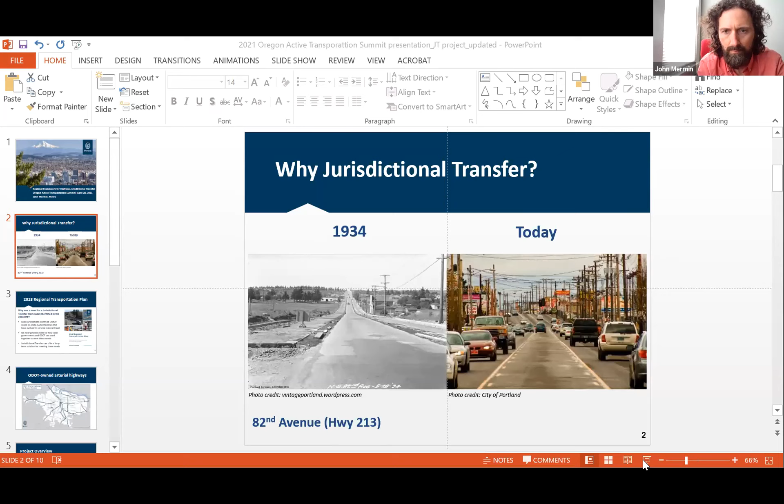Great. So I'm going to talk a little bit about the regional framework for highway jurisdictional transfer project that Metro recently completed with the help of WSP as our consulting firm, and in close collaboration with ODOT. Glen Bolen, who will be speaking later, was the lead from ODOT. And the issue of jurisdictional transfer comes right out of that history that Margi just described.

When some of these arterial type highways were first built, like 82nd Avenue on the left, it was the major route for connecting the whole state to the new airport. And there wasn't much development along it. It served the long distance travel. But fast forward to today, when the interstates have replaced that longer distance function, it's functioning in a much different way, with much more biking, walking, and transit demand along it, and much less longer distance travel. So the function has really changed. So the idea of transferring the ownership has come to be a long-term solution to help address this change.

So in our most recent regional transportation plan, this idea came up because local jurisdictions identified that there are some unmet needs along these roadways. There are safety issues, equity issues that are feeling really urgent. And these roadways are no longer serving state travel, but there wasn't a clear process for how to work with ODOT on how to meet these needs. So jurisdictional transfer provided this long-term solution for helping with this situation.

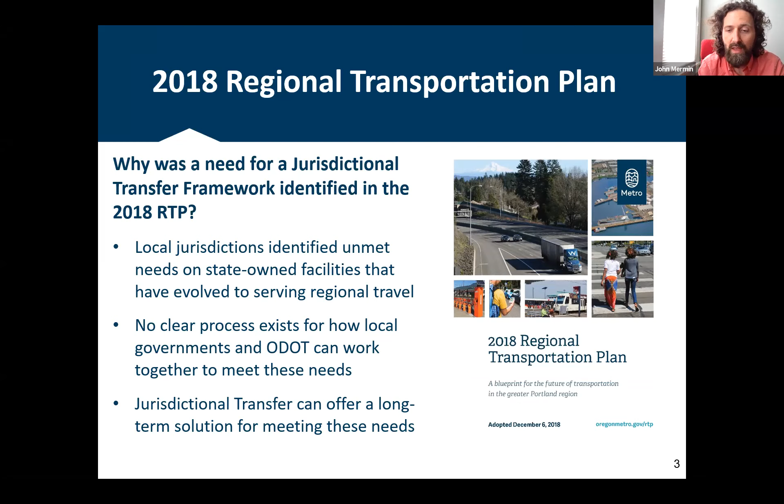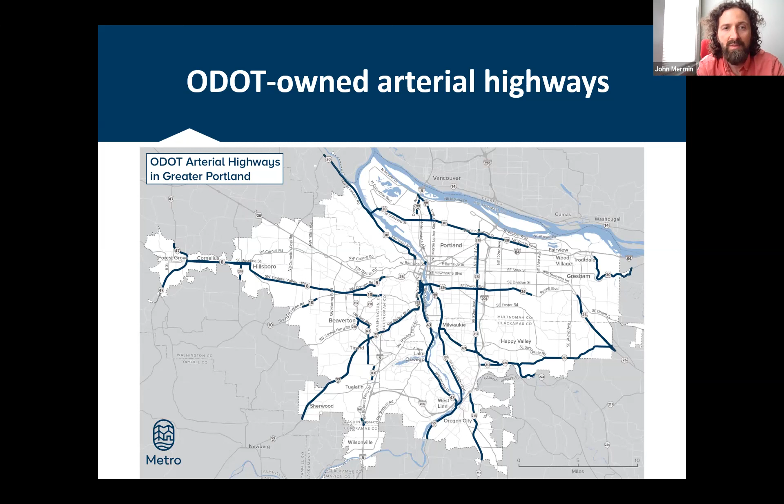So we kicked off the project, and this is the universe of roadways, these arterial highways that exist all over our region, north, south, east, and west. You can see TV Highway to the west, 82nd Avenue in the east, Highway 43 in the south. You can see they're all over the place. And so it's a very relevant issue for the entire region.

So with this project, what we did was really try to create a framework for how to create action on this issue going forward, and address the related issues to transferring a roadway, such as how the roadway is classified in the Oregon Highway Plan, how to do cost estimating when you're trying to fund a transfer, and what are the actual legal mechanisms for transfer. We didn't try to commit any funding or commit any jurisdiction to any specific transfer roadway, but really help set the framework going forward so we can move these along in the future.

So the study, which is available on our website at oregonmetro.gov/jurisdictionaltransfer, contains a lot of elements. There's a nice executive summary that really runs through the highlights. I'm going to share a few images from some of the inventory and atlas work to give you a sense of what you can find in it. But just to run through this quickly, we did a policy framework which described best practices for transferring roadways from past history in Oregon, and Glen's going to provide a few examples of that during his presentation in just a minute.

An inventory and atlas with images and existing conditions information for all these corridors, an evaluation of each corridor based on technical evaluation and a readiness evaluation, so kind of combining those two factors. How to do cost estimates, as I mentioned before, recommendations for changing roadway classifications, what are the equity considerations when doing jurisdictional transfer, and then lastly, a needs assessment on the corridors that seem the most ready, that were in the top tier.

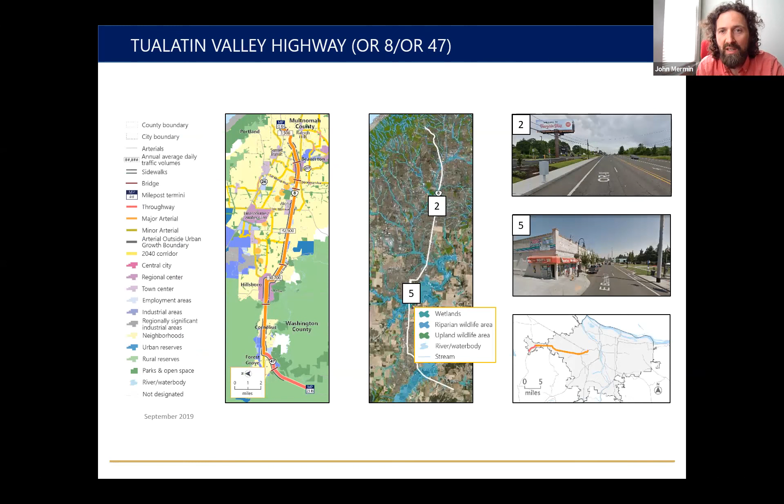So this is an example from TV Highway. This is from our inventory and atlas. You can see a map of the corridor, what the environmental conditions are along it in terms of wetlands, wildlife, and riparian areas, a few images from the different points along the corridor. We provide information relating to existing conditions for the biking, walking, and transit system. What is the speed limit? What is the crash history for both pedestrians, bicycles, and vehicles? And what is the population and employment numbers along the corridor?

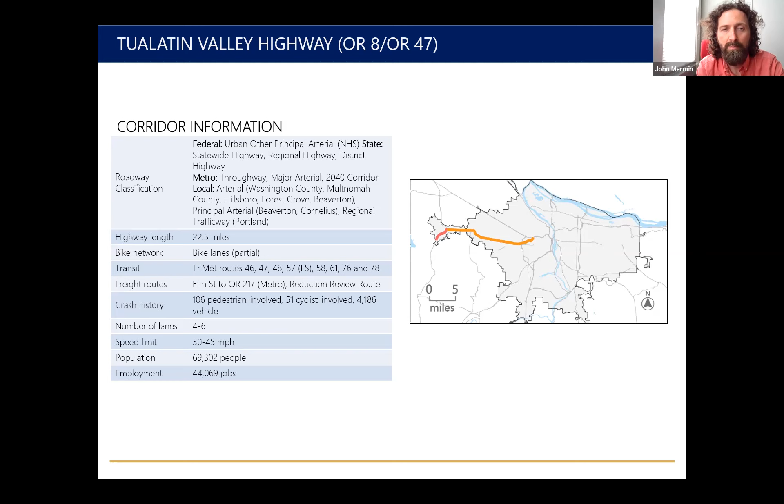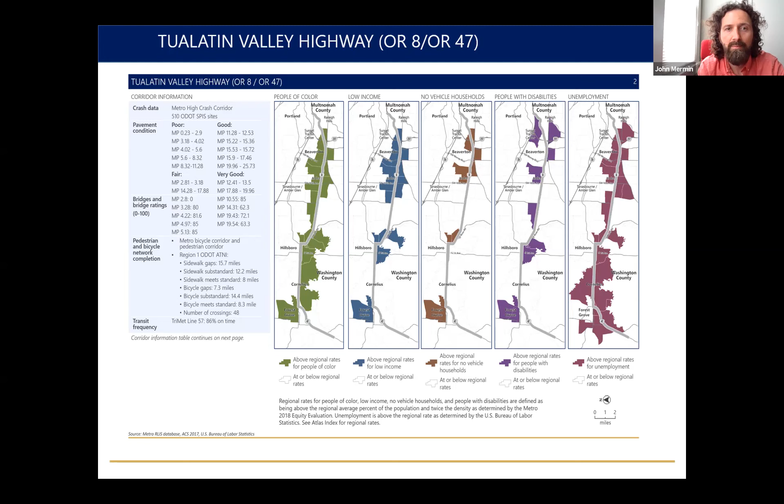With that, I'd like to hand it off to my colleague Glen Bolen at ODOT to talk a little bit about a couple of past transfers that have happened in the state of Oregon. Thank you, John. Just get my screen up. Yeah, my name is Glen Bolen. I am a planner with Region 1 ODOT. My pronouns are he, him, and okay, can't see the screen anymore.

There was incentive or mutual benefit. And these are places where the community was looking for a different type of roadway. And ODOT transferring a roadway is a big cost savings in the long run because of maintenance. With gas tax revenues on the decline, maintenance is becoming a bigger and bigger issue all the time. And so this is a way for cities to kind of get something they want and ODOT to save money in the future as a change occurs.

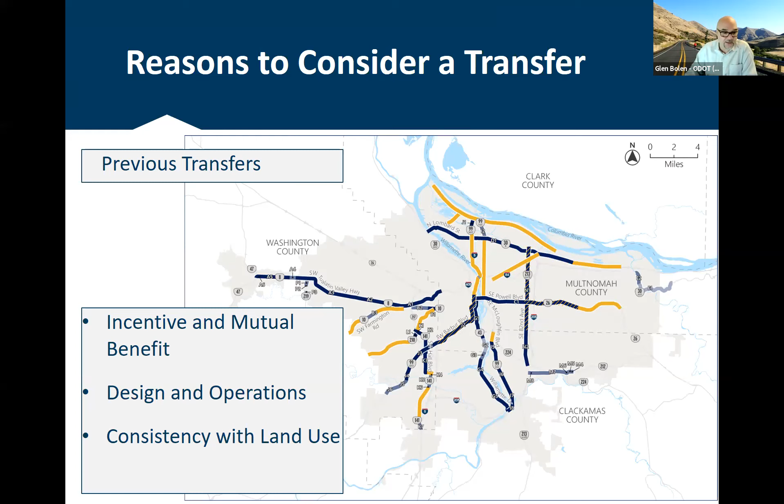And then this one has to do with land use. This is changing environment. I think John showed you a great example of 82nd Avenue and the land use pattern there, as it was when we just had to get to the airport, and as it is now when we have lots of people living and working in the area. So I'm just going to walk through a few examples here.

One of them on the incentives and benefits side is Martin Luther King Jr. So I've got a kind of before-after picture here. Unfortunately, the air photos in 1994 weren't that great, but we had a 5-lane curb-tight arterial. The city wanted to do something different with their design, and you can see now they have on-street parking, they have pedestrian crossings, medians, a significant change from what would have been doable in the highway design manual. And part of the incentive side of this, ODOT did reconstruction of the viaduct further south, gave up some leases and property for use by the city and development opportunities.

There's just one example. Another one, this is on the design and operations side. So this is Forest Grove, 1999. To get through Forest Grove on Highway 47, you went really through Forest Grove, and the city was looking for a highway level of service for a highway, which, as you can imagine, is difficult to do in downtown.

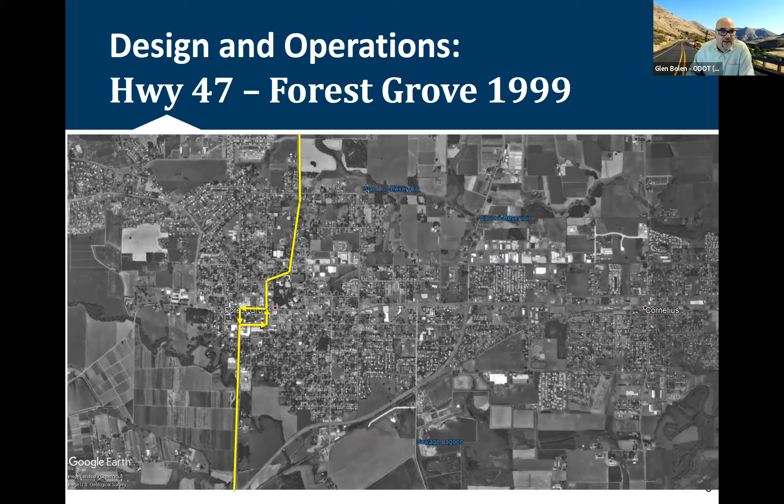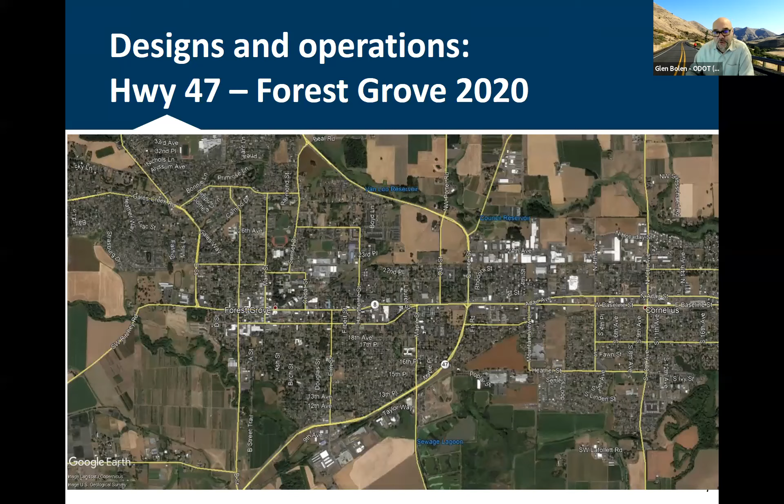So what happened instead, and you see here the road network now, Highway 47 goes around. It's a bypass going around Forest Grove as an expressway, and then the old highway was ceded to the city of Forest Grove. You can imagine downtown Forest Grove really wasn't the optimal location for significant through traffic that happened as we grew.

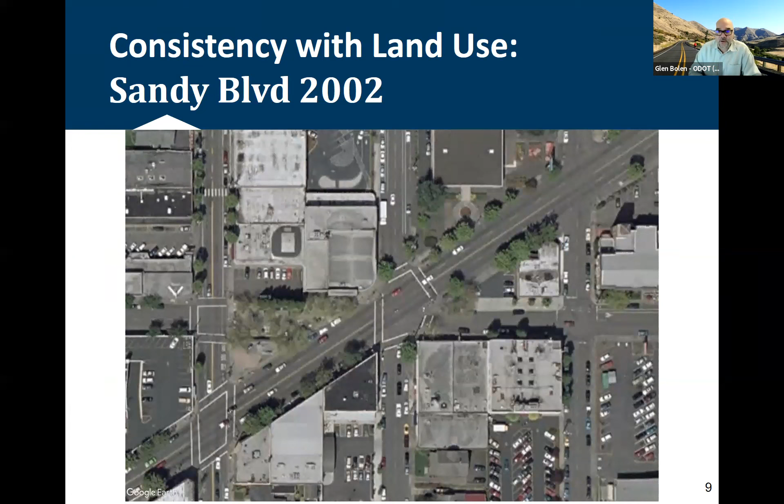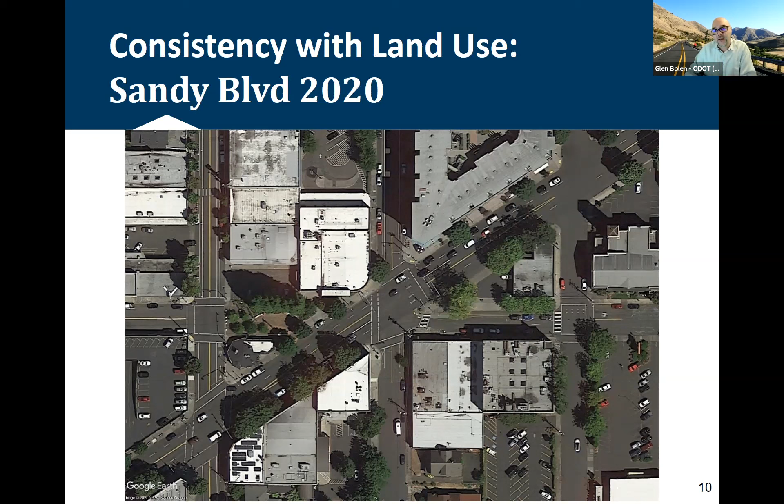Another example here is Sandy Boulevard. This was not on the incentives and benefits side, and there wasn't any big exchange of funds. But in this case, the city just wanted to do more multimodal design, things like markings and streetscape and crossings and furnishings, things to help support the redevelopment of the Hollywood area and beyond.

Unfortunately, I got a rainy Google Earth picture day, but you can see we now have bike lanes, the green suggested crossings and facilities, and redevelopment that's been happening.

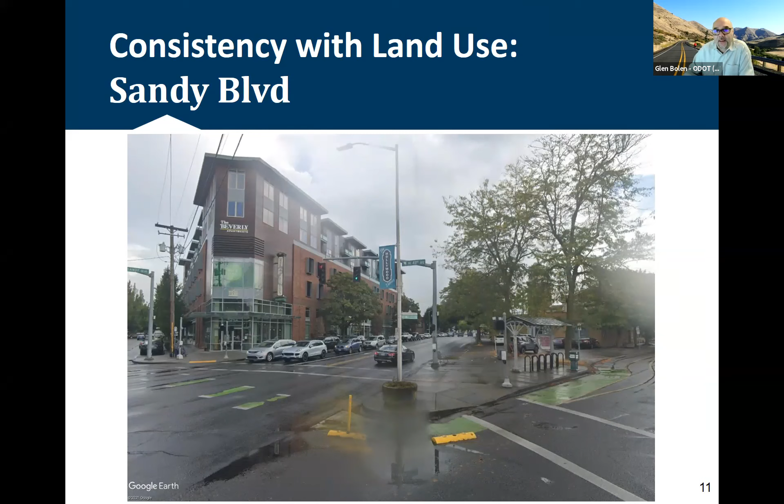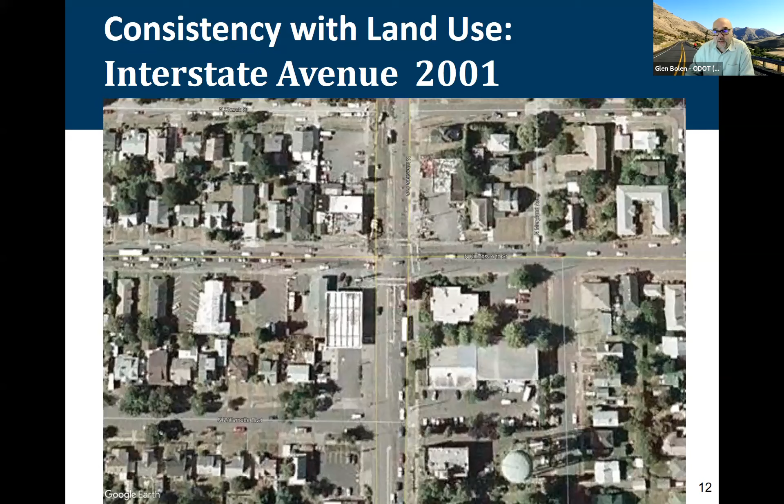And another big example here, and this is another one about changing land use. The city of Portland, trying to implement their comprehensive plan with centers and corridors, was planning with Metro the Interstate Avenue light rail, and the light rail couldn't happen on the state highway, so this one was given to the city of Portland.

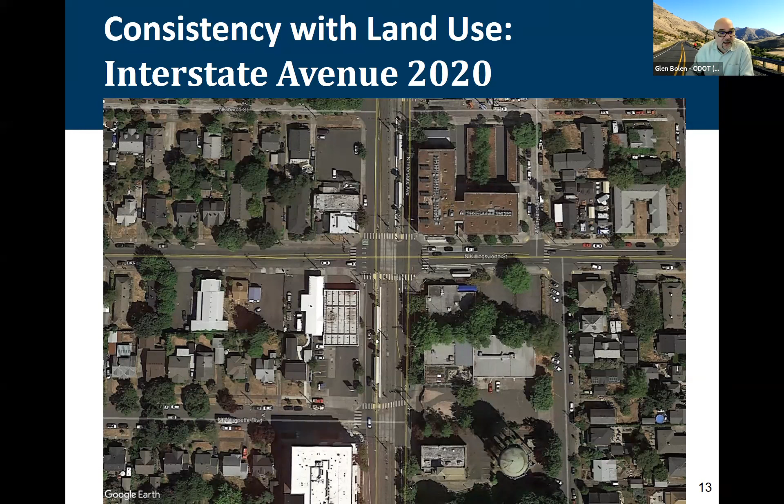I'm sorry, this transfer had no funds. There were some funds involved with Sandy Boulevard, funds from ODOT for state of good repair type of work. So in this case, the light rail went in following the transfer using FTA money and local regional match. And I think you all know what's been happening on Interstate Avenue.

So this is just a quick snapshot of a few examples. We are in conversations with our partners for several others. The City of Portland adopted the 82nd Avenue plan; I think Karla's going to talk about that. Shelli's going to talk about Outer Powell that we're working on. We were hoping to work a transfer for Barbur Boulevard with the bond measure that did not make it, so that's on hold for now.

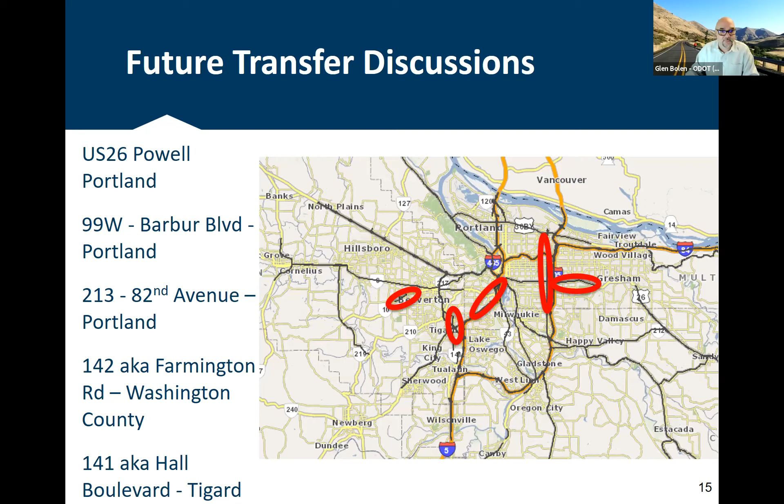We're engaged actively with the city of Tigard for Hall Boulevard. It's a residential corridor there north of their downtown, and they'd like to make some changes. And then a small piece of Farmington Road out in Washington County. So that's just what's on the radar, but this report hopefully presents the options for other opportunities throughout the region. And with that, I will stop sharing my screen.

I think, Karla, are you next? I think it's Shelli next. Shelli. Yep. Hi, everybody. Okay. You see my screen? Not yet. Okay. One second here. Sorry, having a little bit of technical challenges sharing my screen. There it is. Okay. I just made you co-host, Shelli, so let's see if that helps with your screen sharing. Okay, thank you. I think we should have it now. There you go. Okay, thank you, Sarah.

Hi there, I'm Shelli Romero. I am Area Manager Central for ODOT Region 1. Most of my projects are within the Central City. So this is a quick presentation on ODOT and PBOT moving towards a jurisdictional transfer, focusing on Outer Powell.

Outer Powell specifically is a high crash corridor and had a lot of need for safety improvements and also basic infrastructure: bike lanes, crossings, sidewalks. The basis of the project was to make Southeast Outer Powell safer for all people using all modes. We had robust community and agency involvement and collaboration, and worked with the community, PBOT and other partners to identify community preferred solutions.

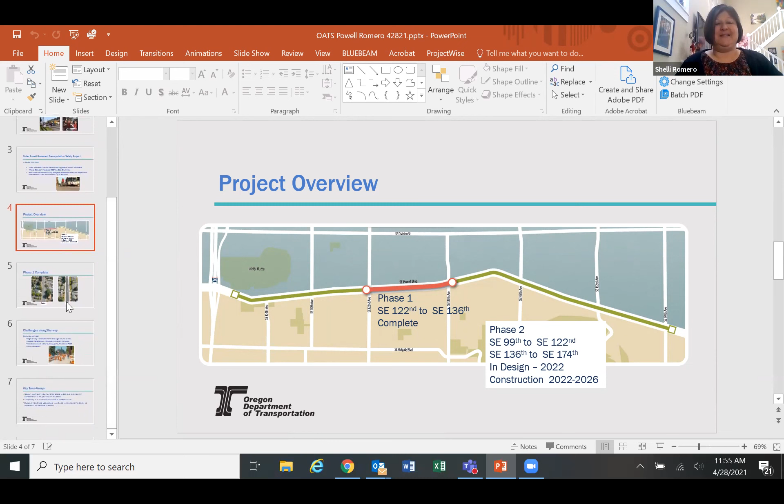So this is a picture of the before and after of phase 1, which is Southeast 122nd to 136th. You see the before on the left and you see the after on the right. And that is separated with Tuff Curb bike lanes that you see there.

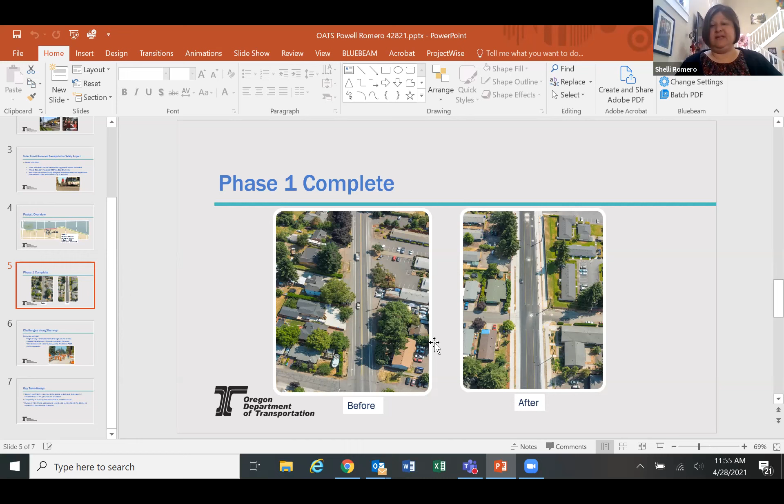Challenges along the way: as I mentioned, it's a complex corridor. We found there's a lot of right-of-way issues, so undefined driveways that need to be defined, acquisition of a small amount of right-of-way for our project, but also encroachments, meaning that people have been parking on the side of Powell for years, which is technically ODOT right-of-way, but we've never really enforced that.

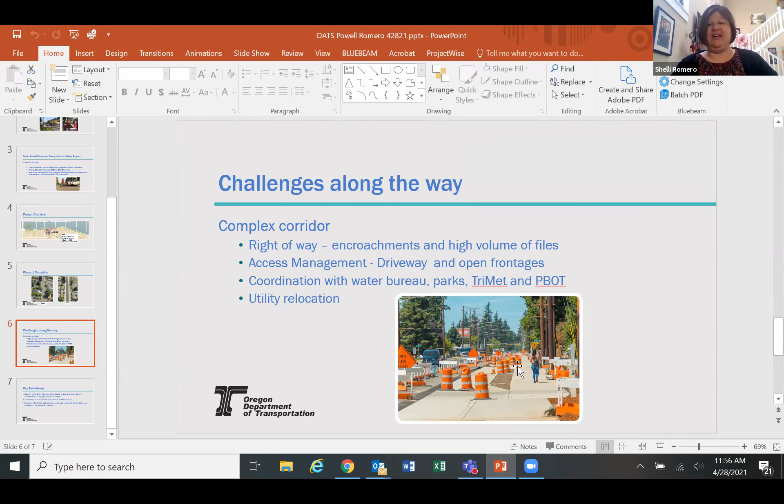So access management, as I mentioned, the open frontages and driveways, and then coordination with the Water Bureau, Portland Parks, TriMet, PBOT, and then there's a whole mess of utilities out here, not just the water line, but PGE, Northwest Natural, communications, which, if that doesn't go on schedule or as planned, can cause a lot of risk to the project.

So our key takeaways are that we worked together with our partners at PBOT and others in the community to identify a long-term vision and the steps to achieve the vision, on the premise that everybody in our city deserves basic infrastructure. This is a transit-dependent route. Besides English, the highest number of folks in the area are speaking Chinese, Vietnamese, Russian, and Spanish. And finally, getting support from the state legislature to provide funding and to initiate a jurisdictional transfer.

And that's what I've got. So with that, I'm going to go back and get out of here and turn it over to you, Karla. Thanks, Shelli. I will share my screen. Thank you. Great. Are folks seeing my screen, just to confirm? All right, I see a thumbs up. I will put it in

presenter mode. All right, so I am Karla Kingsley. I'm a senior planner at the Portland Bureau of Transportation. And today I'll talk a little bit about 82nd Avenue specifically. I'll note that Kristen Stallman is kind of my counterpart on 82nd Avenue. She was going to be here, but with the shift in dates, she had a conflict. But thanks a lot to her for helping prepare and for doing all this work.

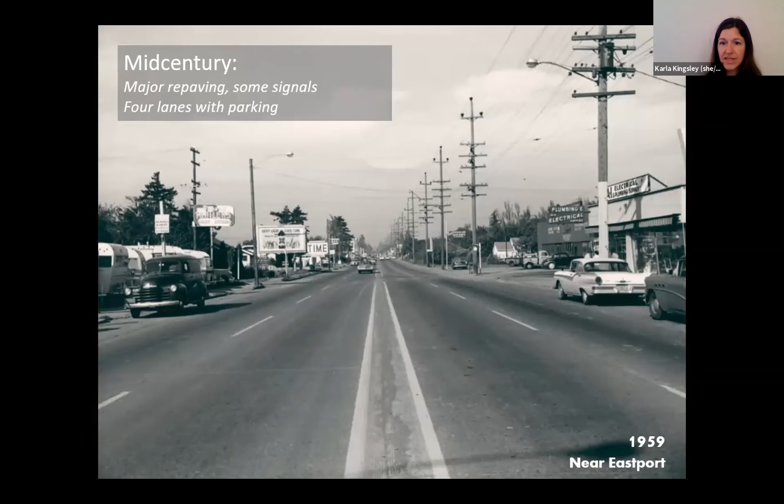So this all kind of happened in the 30s and 40s. Then mid-century, there was another major investment in the street. There was a big repaving. The street ended up being four lanes, and it had parking on the outside. This is the picture I wanted to get to. So that middle part where the four lanes are now has that concrete base under it. And then where the parking lane is, they filled it in with a softer aggregate base and paved over it, and then put the curbs in place.

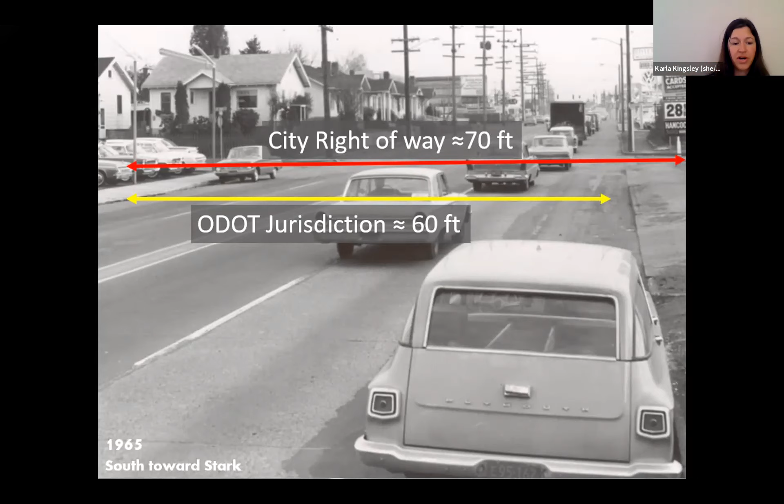And this is when the current physical configuration was developed, with about 60 feet between the curbs and about 70 feet, in some places a little bit wider, with the right of way, including the sidewalks. So you can see that outer part where the car is parked looks a little different, and there's a reason for that.

And I keep coming back to that. There's this really nice concrete base in the middle that's very strong, still there today. And then the outer 8 feet, you can tell it's a little bit more rutted, it's cracking. And so these are the kinds of things that we were trying to examine as we were looking towards jurisdictional transfer. And that outer lane is still there today.

So pavement condition is just one thing we looked at, but in addition to that, we were trying to assess all the different, what we call assets along 82nd, the infrastructure assets: signals, lighting, drainage, structures, sidewalks, and everything related to basic safety. And I think I've heard it described as kind of like our home inspection.

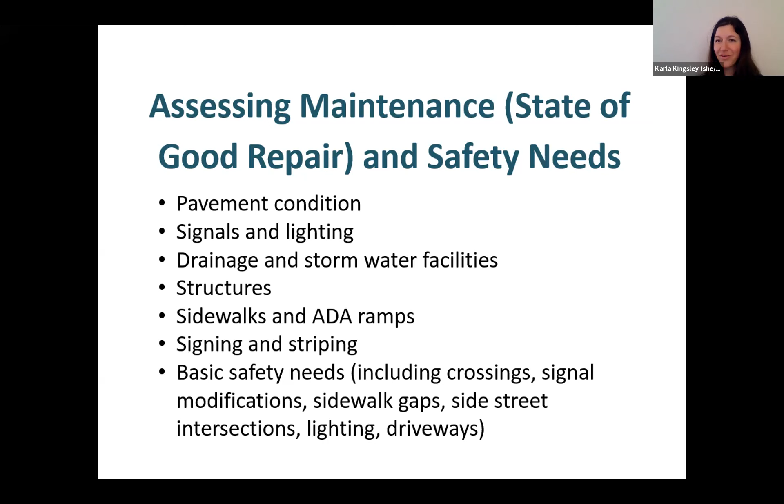If we're considering transferring the ownership from ODOT to PBOT, this is our home inspection period. Most people wouldn't buy a house without an inspection, although I hear it's getting more and more frequent with the real estate market as it is. But we agreed an inspection was a good idea. So that's really what we've been trying to do.

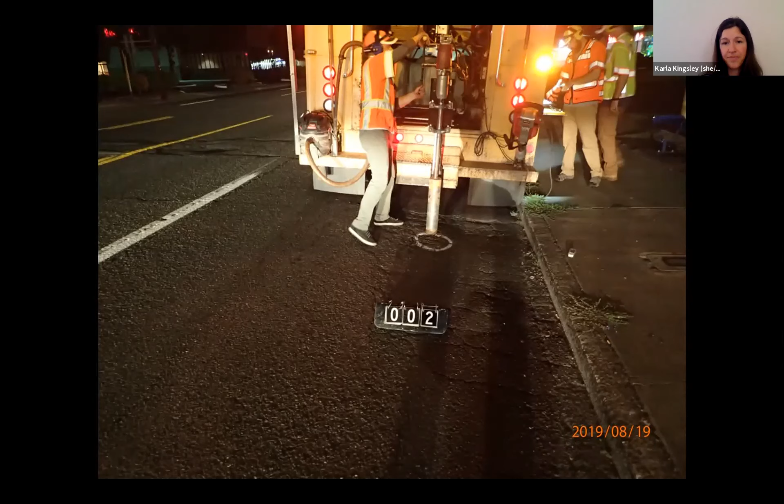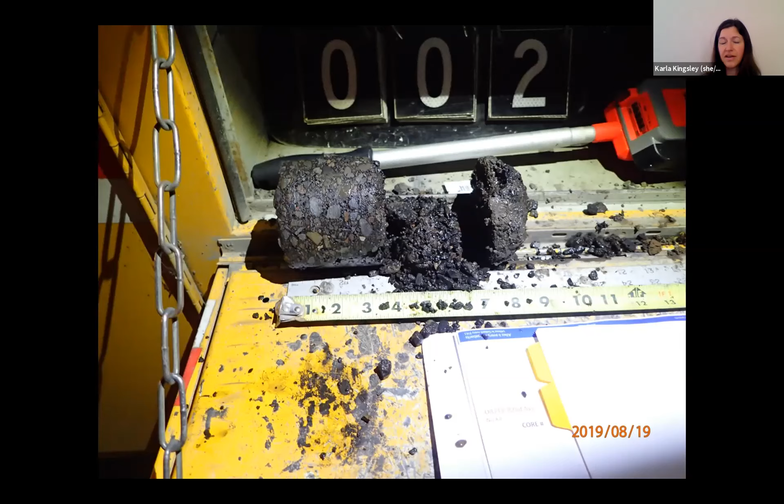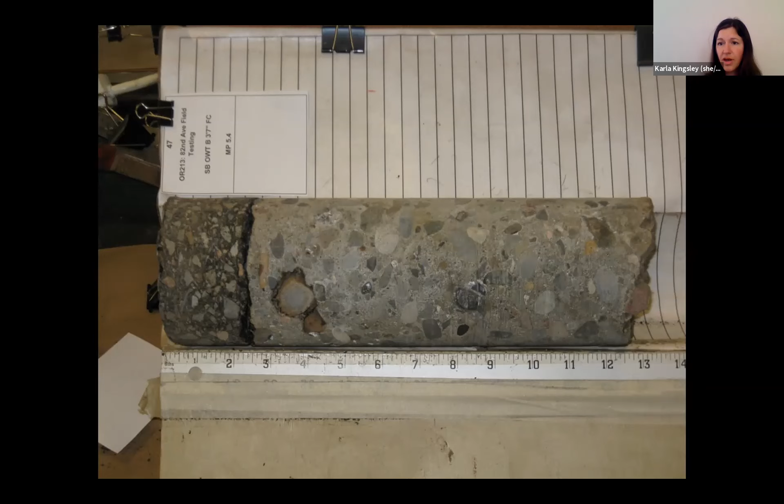And so this is the type of information that we use to come up with what types of investments we need to do to get 82nd up to a condition that we would call a state of good repair. And that gave us a sense of how to then estimate the cost of the overall investment on 82nd that's needed.

So where are we now on the path? We have community support both for investment and for jurisdictional transfer on 82nd. We have a shared commitment. Both PBOT and ODOT agree that this makes sense to achieve a transfer. And now we have a good understanding of what is needed on 82nd.

I'll note that with the regional transportation funding measure, we were doing a lot of this work around jurisdictional transfer during that process, and it would have likely been a catalyst for jurisdictional transfer. As you all know, it did not pass, but I think this work and the work of the measure as well prepared us for upcoming opportunities with funding and transfer.

And I will say that the conversation on 82nd is ongoing, and there are opportunities in front of us right now. I won't go into that now, but as we transition to questions and discussion, I'd be happy to talk about that or have Shelli, Glen, Margi and John chime in as well. So thank you.

Great. Thank you, Karla. These were all really good examples. We've got questions in the chat. We're a little bit ahead of time, which is great because we're getting comments. We have questions.